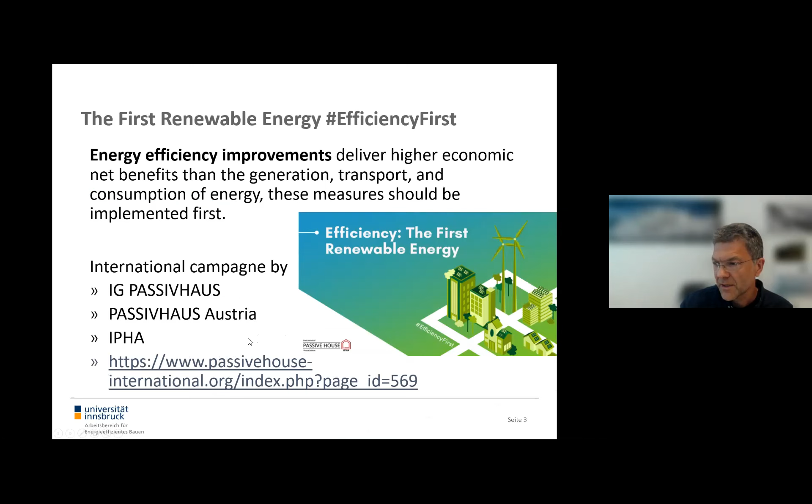If you are further interested, here's the link where you can find a lot of videos on these topics in international languages. What is the focus? So the delivered energy consumption in the residential sector is mostly space heating, 63%, and others like lighting, cooking, and so on, but also almost 15% water heating. So these two issues are where we have to focus on.

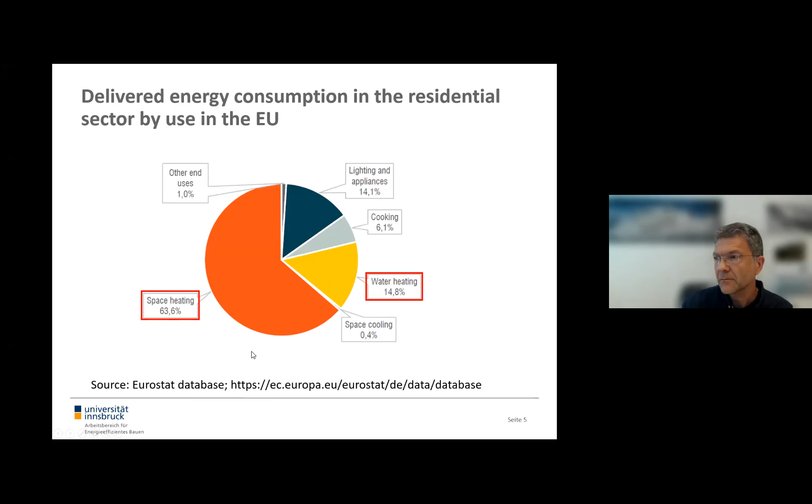Paving the road to zero-emission buildings is twofold: energy-efficient building envelope and domestic hot water, also household appliances. Energy-efficient building envelope means we have to reduce the transmission losses, reduce thermal bridges, and improve the air tightness of the building envelope. This not only for new buildings, but also for refurbishing existing buildings. And we have to introduce ventilation heat recovery, which is also possible for existing buildings.

How about domestic hot water? First of all, we have to reduce the distribution and storage losses - that's a big issue. And again, we can use heat recovery. Heat recovery on domestic hot water is a big lever to reduce energy consumption in the residential sector, and we have to remove the barriers for this wastewater heat recovery.

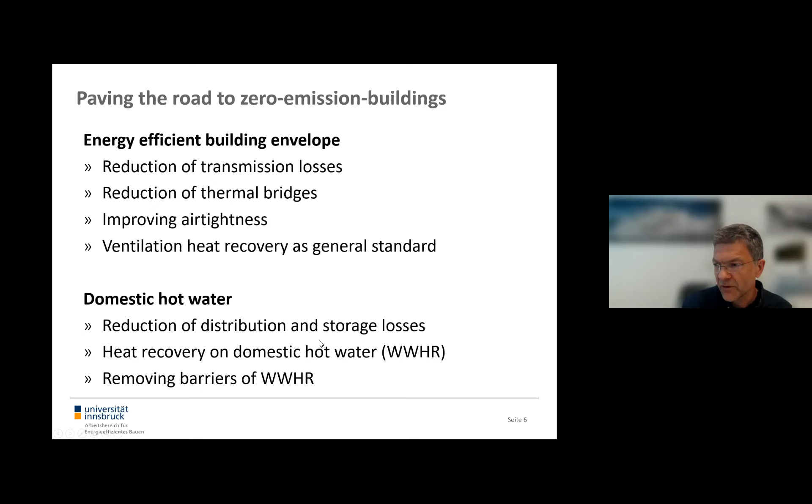Keep an eye on the sewage losses. Like ever, it's out of sight, out of mind. You know these infrared pictures where you can clearly see the transmission losses of walls, windows, roofs, and so on. But what's underground? You can't see it. So let's have a look underground.

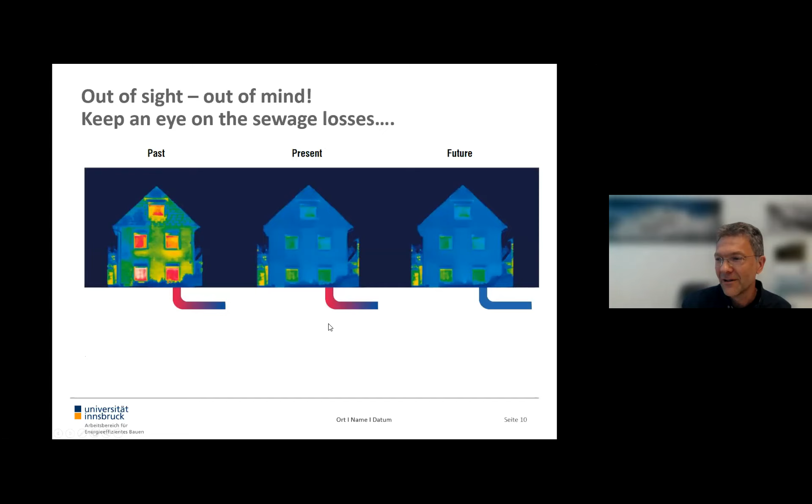You have the sewage losses. If you don't have any heat recovery, the heat is released to the ground.

I'm sitting at the moment in this building, actually here, if you can see my pointer. This is really an EnerPHit refurbished building, an office building from the 1970s, with a former heat demand of 180 kilowatt hours per square meter and year, and now after renovation in EnerPHit standard with less consumption than 20 kilowatt hours per square meter and year.

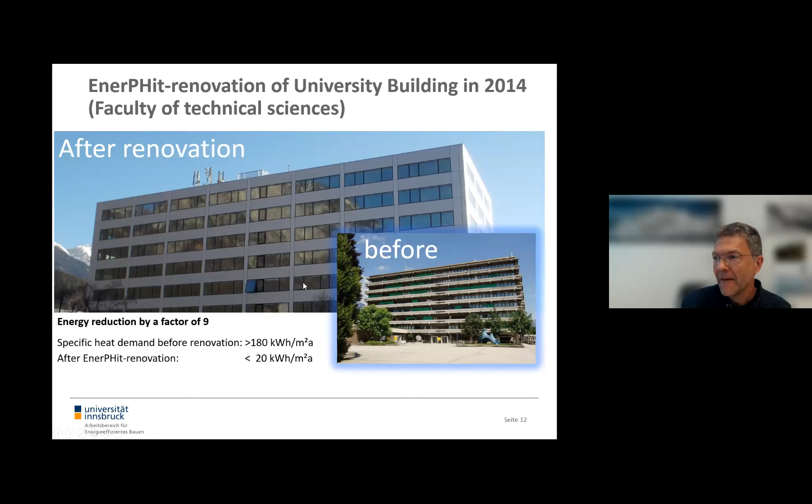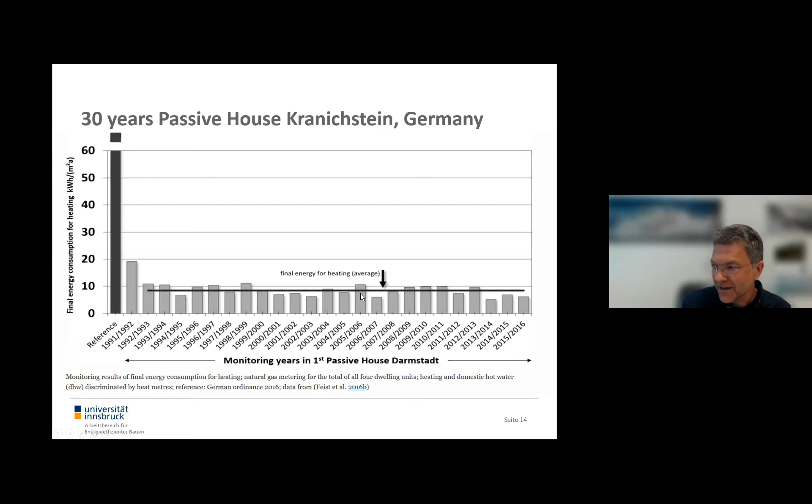It works really good since several years now, and it's worked for 30 years in the first passive house in Darmstadt-Kranichstein in Germany. It's been measured for many years now, and it has proven to have a lower final energy consumption for heating, less than 10 kilowatt hours per square meter and year. That's really measured data, not calculated, but really measured.

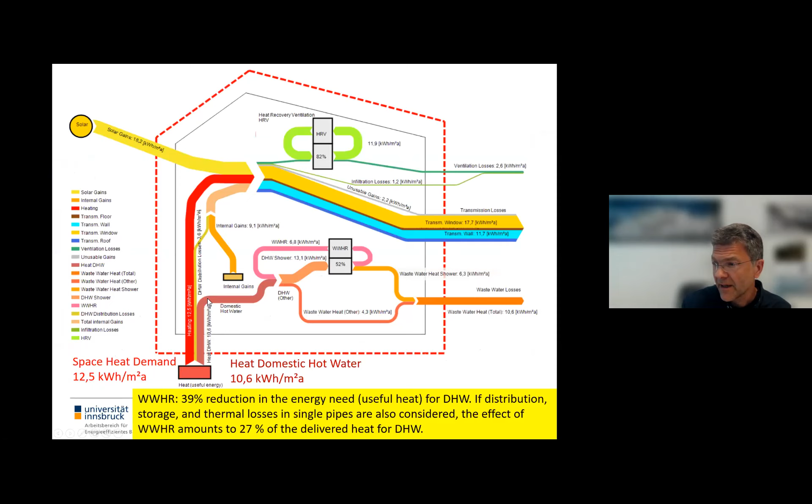Let's have a look at the energy balance of this building with a space heat demand of 12.5 kilowatt hours. We have some solar gains, we have internal gains, but we have losses. The losses are minimized by heat recovery with a heat recovery rate of 82%, around 12 kilowatt hours per square meter and year are recovered for ventilation.

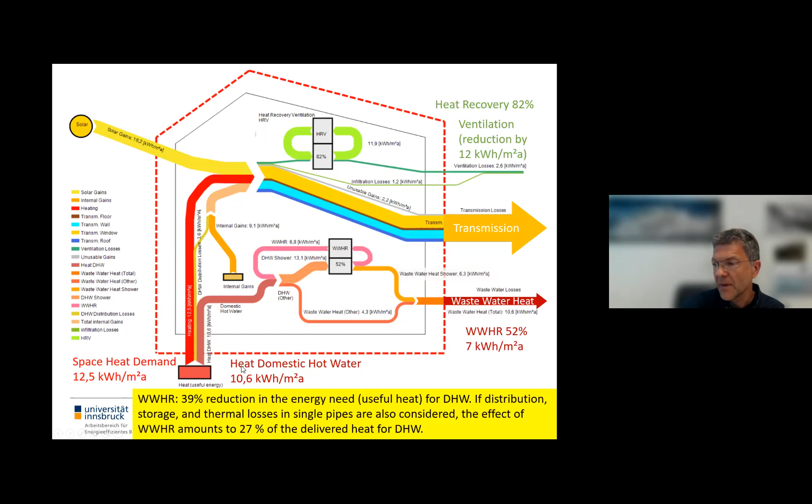The transmission losses are reduced to a minimum by good insulation, by reducing the thermal bridges and so on. And last but not least, wastewater heat recovery can also help to reduce the demand for heat for domestic hot water.

I will present some of the outcomes of our study on wastewater heat recovery systems. One of the major authors is Pavel Sevela. He's also here if you have further questions. And Johannes Frenger and Jürgen Schnieders from Passive House Institute.

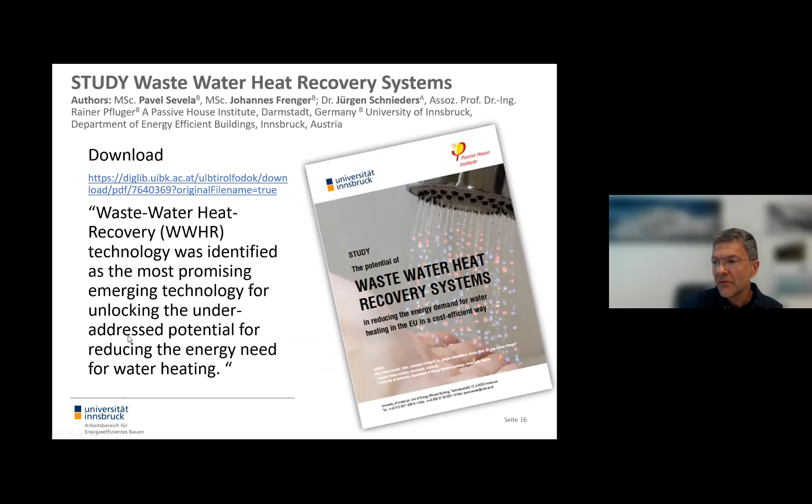We stated that wastewater heat recovery technology was identified as the most promising emerging technology for unlocking the under-addressed potential for reducing the energy need for water heating. How does it look like?

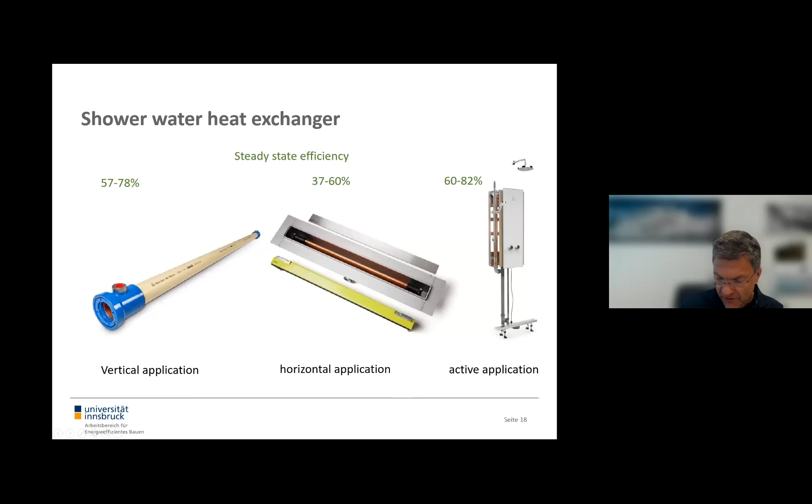If you've never seen it, there's a duct type for vertical application, a horizontal application for a shower drain, or an active application, which is also vertical. This is actively driven by pump, and these are driven by gravity.

So we focus on the best possible hydraulic connection. How does it work? The heart, the core of the system, is a counterflow heat exchanger, taking the heat in counterflow from the sewage water, from the bathtub or from the shower tap, and preheating the water for the heater and for the cold water for the mixture. This is the best way to do so.

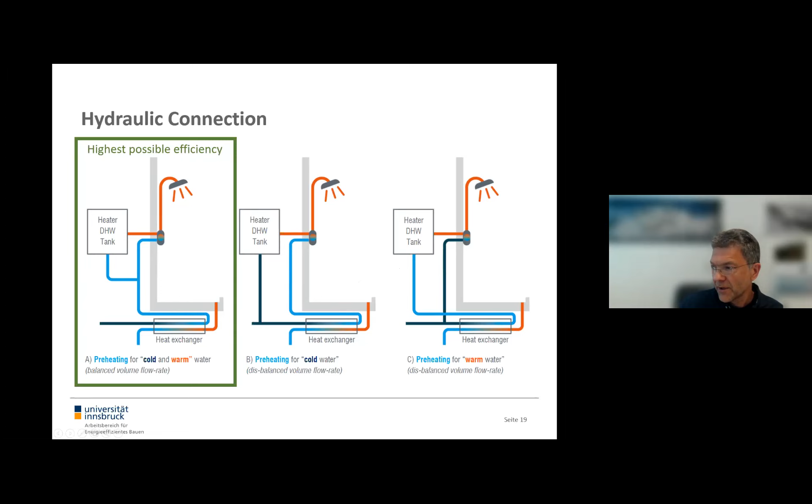There are two other options which are less efficient, for only preheating cold water or only preheating warm water. But let's focus on the highest possible efficiency, preheating both.

How high are the costs for the saved energy with this system, in euros per kilowatt hour saved? This strongly depends on the climate. Why? Because the cold water temperature in different countries is different.

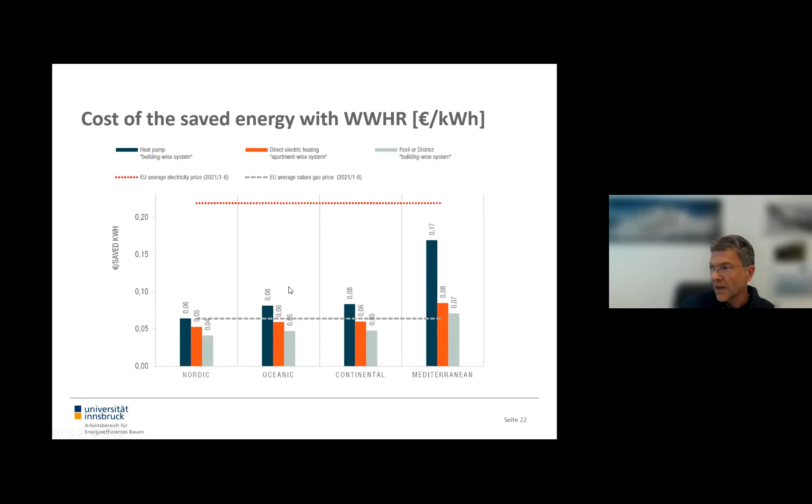It's coldest in Nordic climates and warmest in Mediterranean climate. The savings are highest in the Nordic climates. To give you a relation about the cost of energy in terms of heat by natural gas in the European average, or electricity price, here the red dotted line, we see that in Nordic, Oceanic, and most of the continental climates, it's even lower than the average price for heat in terms of natural gas.

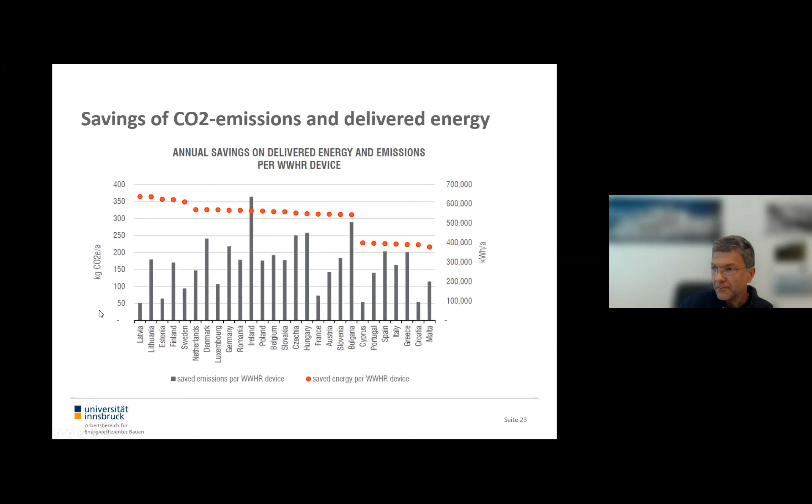One of the outcomes of the total saving potential in the EU was that if in the period between 2022 and 2030, every second renovated or newly constructed building in Europe were equipped with a wastewater heat recovery system, 35.7 terawatt hours less energy would have to be generated, saving 6.6 megatons of CO2 equivalent.

This is with the assumption of this renovation rate. But if you assume that the total current building stock would be equipped until 2030, you would end up with a consumption drop of 100 terawatt hours per year. With this amount, you could reach the goal for hot water with this technology only. So you see the huge potential if every building would be equipped with this system.

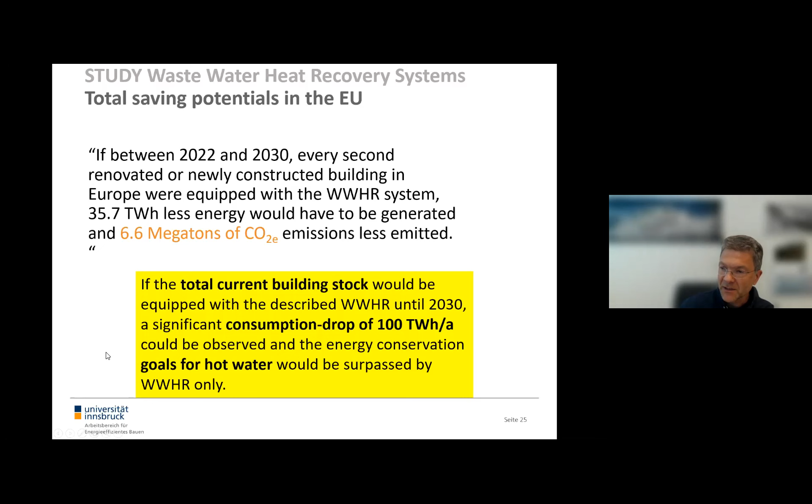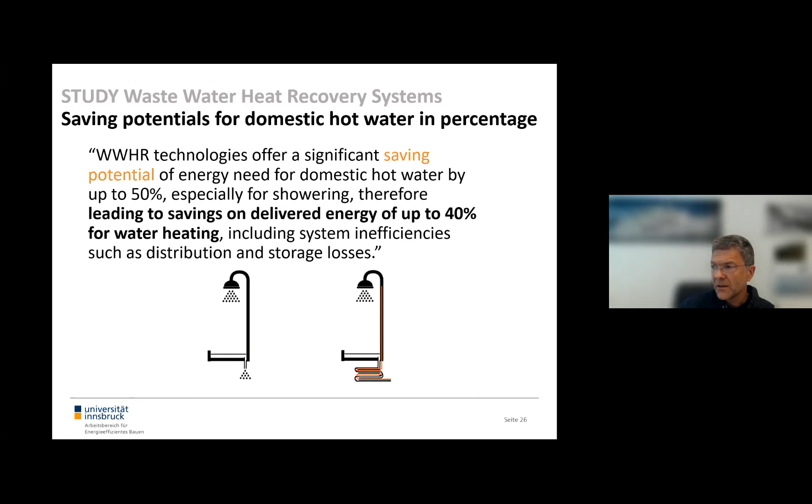Saving potential in percentage is around 40% for hot water heating, including system inefficiencies such as distribution and storage losses.

So what are our suggestions for a European legal framework? First of all, intensive information campaigns for customers, craftsmen, and industry are needed. Highly needed is training for professionals, as well as craftsmen, planners, and university training. Subsidies, especially in the first phase of this evolving technology, are important. And last but not least, the removal of legal and practical hurdles is important.

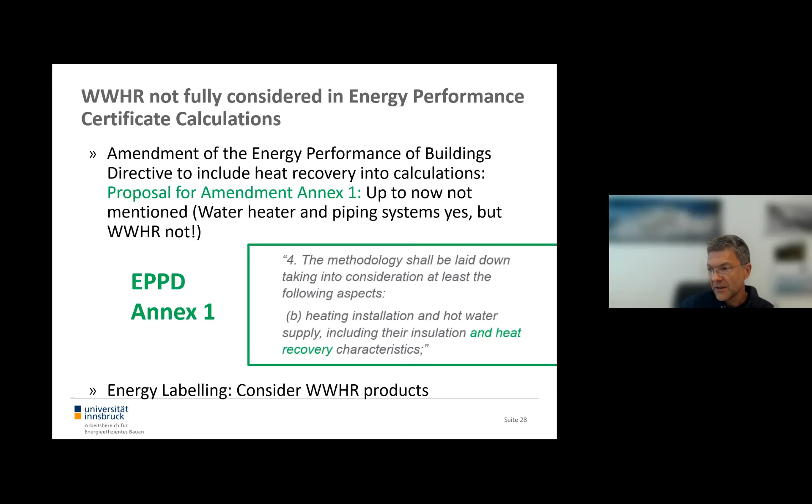A suggestion for an amendment to the EPBD Annex 1 would be to add the words 'and heat recovery characteristics' in section 4, to highlight this new technology as a huge lever for reducing energy. Also, energy labeling could help.

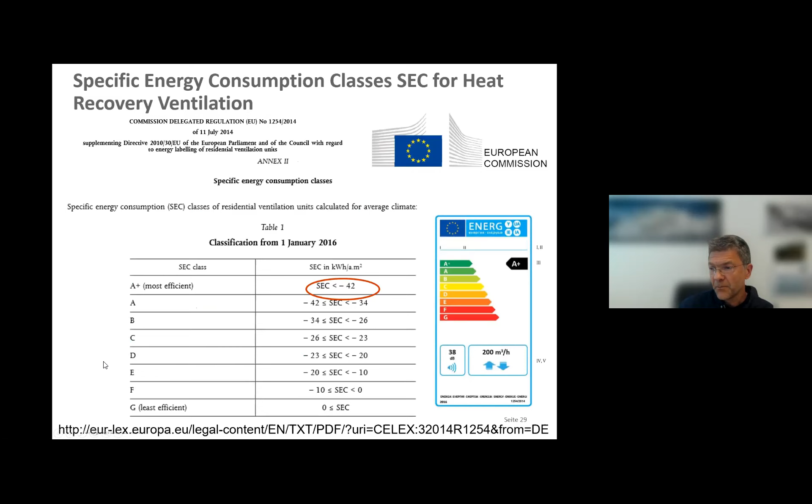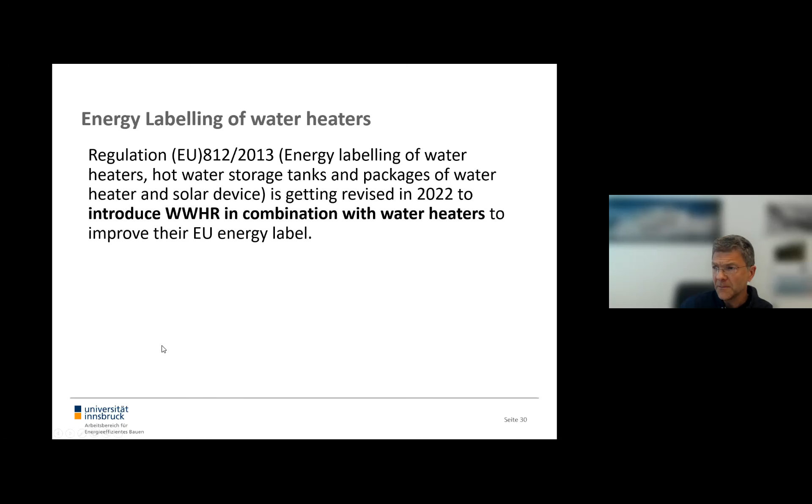Energy labeling is already installed for heat recovery ventilation, the SEC rating. Similar things could be done for wastewater heat recovery also. In 2022, wastewater heat recovery in combination with water heaters will be introduced to improve the energy label. That's a good step. Last but not least, we have to remove the barriers of wastewater heat recovery.

I think we should have a European-wide harmonized performance and hygiene test procedure for wastewater heat recovery systems to indicate their efficiency. The price should be reduced.

This could be done by mass production on a European-wide scale. There are some issues with the double wall construction, which is one of the reasons for higher costs and less efficiency. So exceptions for mandatory double wall constructions, like in the Netherlands, could help for this evolving technology.

Professional know-how for application is important, so education is important. And last but not least, fail-safe installation by prefabrication of systems could help to avoid mistakes in mounting and engineering.

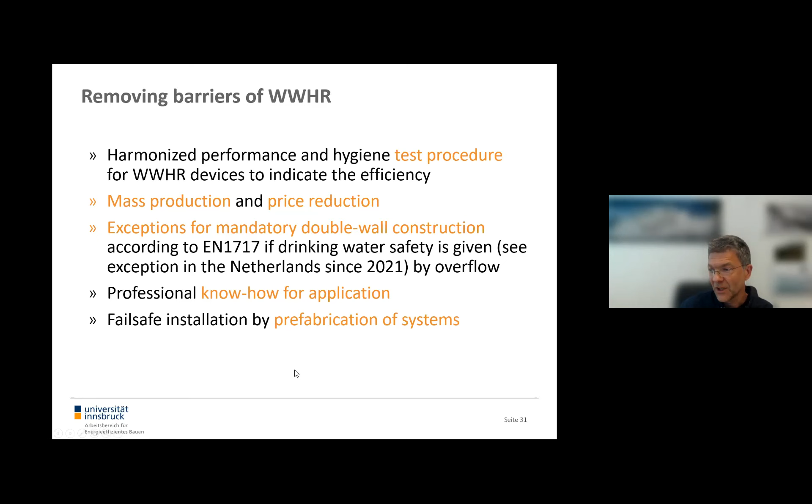Summary, in a nutshell: the passive house principle for new buildings and refurbishment is a big step ahead, especially the EnerPHit standard for refurbishing, which is important in the next few years. The efficiency-first principle in the building sector leads to reduction of heat losses from the envelope. Ventilation and domestic hot water heat recovery could help also, and heat losses from domestic hot water distribution systems represent 30 to 50% of the delivered energy.

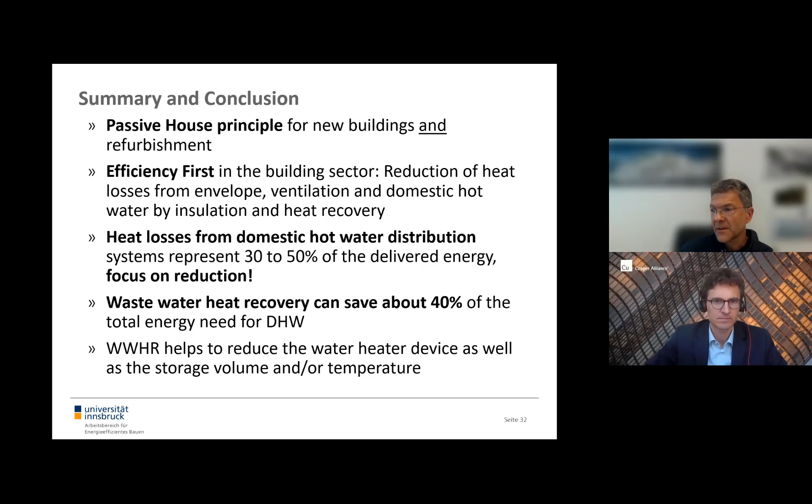So we should reduce these losses highly. That's really important, as well as wastewater heat recovery, which can save about 40% of the total energy need for domestic hot water. This technology also helps reduce the water heater device as well as the storage volume and temperature.

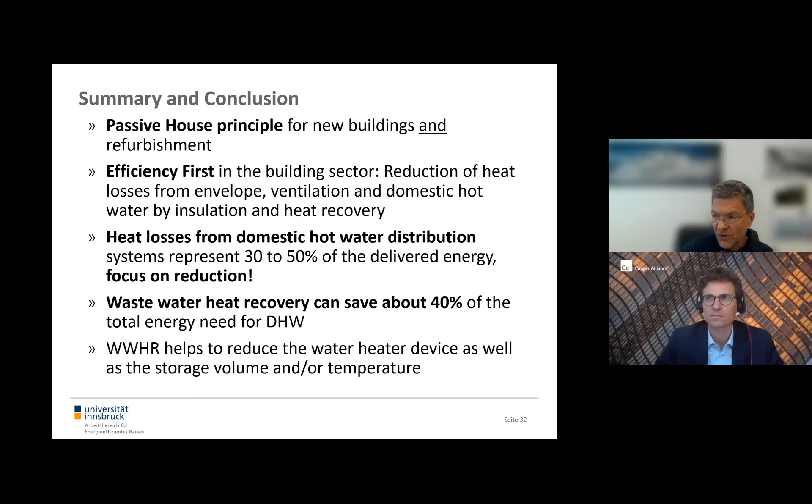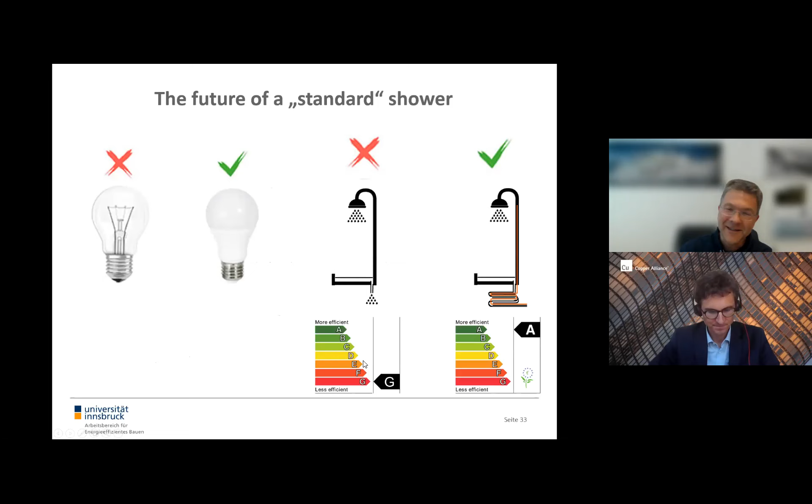So maybe in future it will be similar to incandescent bulbs substituted by LED. Maybe in future this will be the standard, and not a standard shower without heat recovery. Thank you very much for your attention.